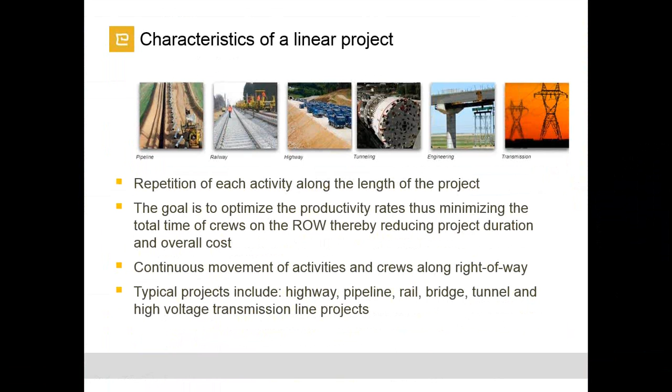And typically, linear project types can be, for example, road projects, bridge projects, transmission line projects, rail projects, metro projects, pipeline projects, and we also advise it for high-rise buildings of over 30 floors. We can also use TILOS there.

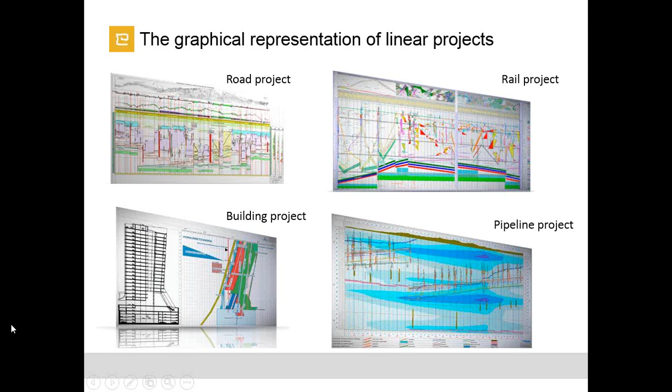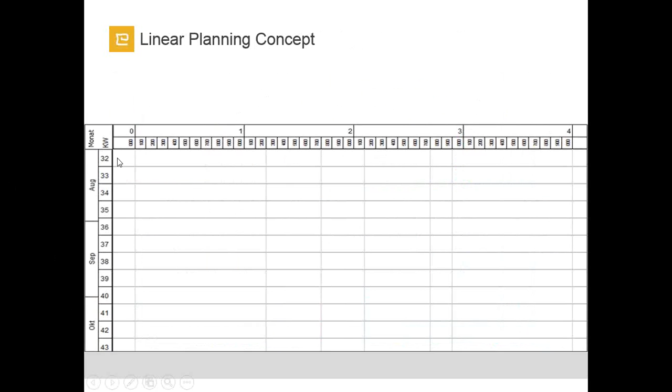And what is the concept of the linear planning method? Most of you probably know, but I would like to briefly explain it in case someone is new. So we have here our distance axis, which shows us our project is between 0 kilometers and 4 kilometers. And the project duration is more or less 3 months.

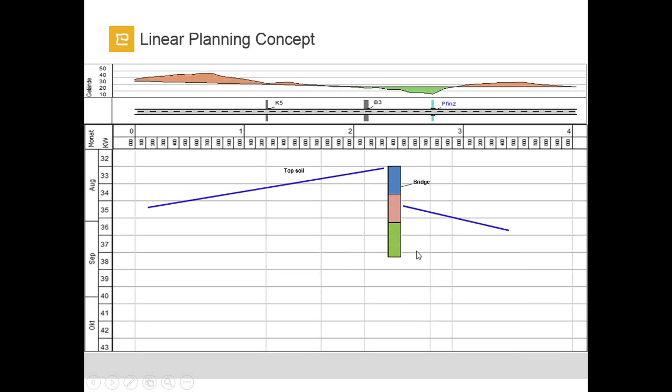Let's say that from the left side of the river, we found it more feasible, and we start our first activity, topsoil, from this chainage, moving to 0. Later on, we start from the other side of the river and move to the 4 kilometers. And it is also possible to plan non-linear activities such as bridges or culverts in our project in TILOS.

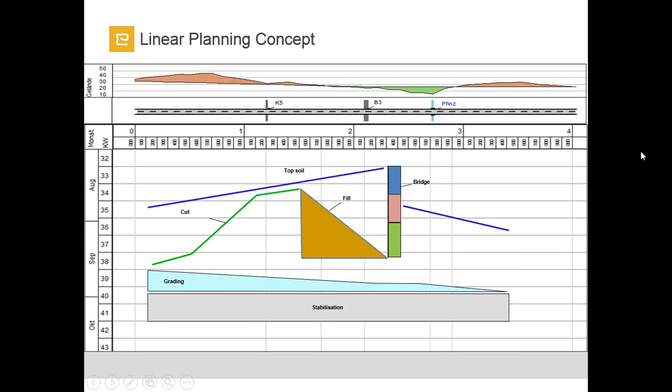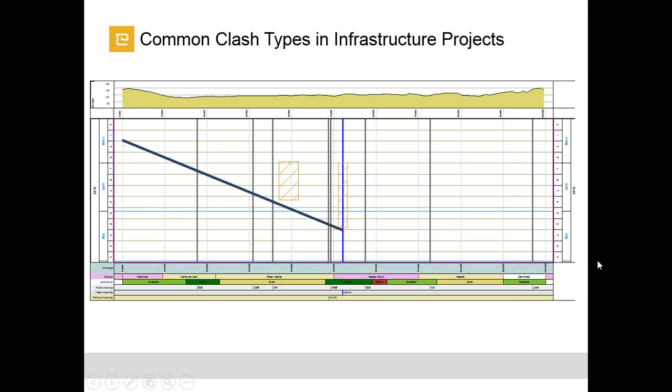So we can start again as we planned. We can come to this point, wait around 1 week, and again proceed with our work. Or we can again come from here and move the crew to the other side of the river. But in such projects, crew movements are quite expensive, so it's not a very preferable solution. And in this scenario, we moved the start day of the project around 1 week, and you see that we now have no conflict.

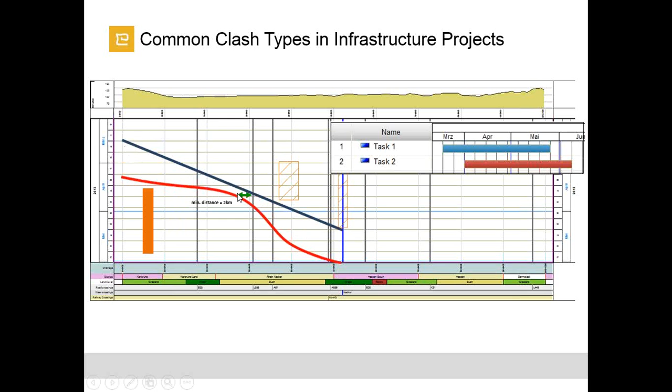We are telling the system these two activities cannot be closer than a minimum distance. Let's say that it is 2 kilometers in this example. So the system will not allow us to be closer than the minimum 2 kilometers to the first activity. Here, as you see, this distance is much wider. Also here, but it is taking the minimum distance. So in this way you can avoid the clashes in TILOS, and these crews do not come closer than 2 kilometers to each other.

So what we can say, comparing with the traditional methods with CPM or network diagrams, TILOS connects the geography and the constructability issues with a project. But CPM schedules or network diagrams fail to provide a visual connection between the project plan and the project itself.

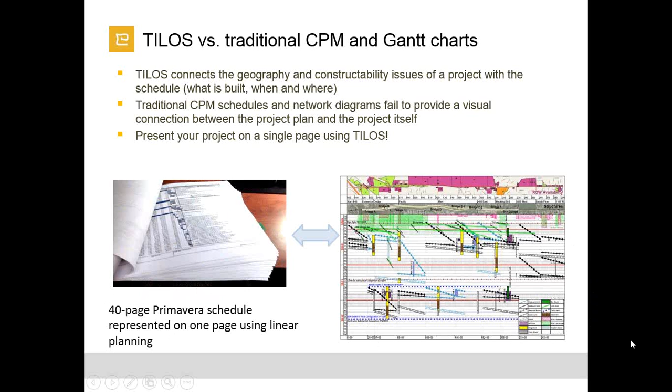And the second thing is, when we are producing a 40-page schedule, it is ambiguous and we cannot see clearly the interaction with the activities. But here, when we have all the activities integrated with geographical data and all the other information, we can clearly see if there are any clashes, what we should take into account in our planning starting from the early stage.

So we prepared here clash types. Of course, this list can go longer. Let's say crew clashes, for example, which we see mostly in our projects, and environmental protection clashes, traffic diversion clashes, utility diversion, multiple contractor clashes.

So this list can go really much longer, as nowadays our infrastructure projects are mega and really very complex, and they require control of the projects, and when we are especially working with multiple contractors, the communication problems are huge, and it is affecting our project on site. Even though we are working in the same company with different crews, it is challenging to have the best communication.

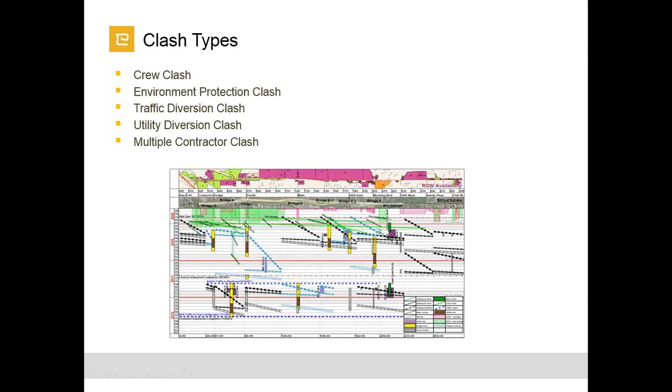So how is TILOS avoiding the clashes, eliminating the planning mistakes? As we said earlier, first of all, TILOS allows us integration of the data. We can import the graphics, we can synchronize them with our distance axis. We can add, for example, site data like elevations and the productivity profiles. And we can specify the distance between the crews to avoid clashes, and it is helping us to deal with the clashes.

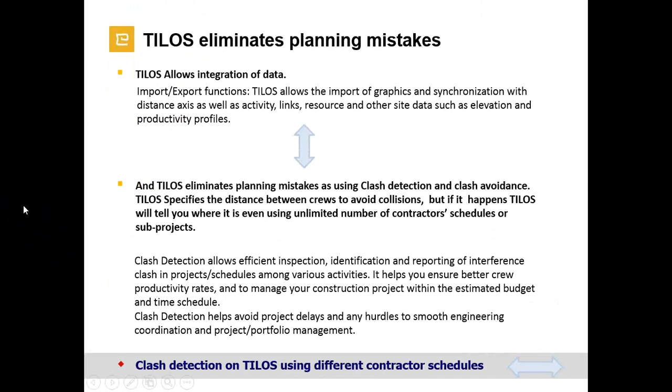Now I would like to show you a small demo project. I will also have a live presentation of it, but first of all I would like to move from the presentation. So the scenario is like this: let's say we are the main contractor and we have work to do, and we subcontracted part of our project to 3 different subcontractors. And the subcontractors prepared their own schedules, and as we are the main contractor, we would like to integrate all those activities as a whole project plan, and we will analyze if there are any clashes between them.

So let's say that this is our first contractor who is responsible for these activities, and he plans from which part he's going to start and how long this activity is going to take. And here you see that as a sub-project, we wrote this as Contractor 1. And now we have Contractor 2 also in the sub-project. You see here a different name as a sub-project. And let's say that these guys also have 2 activities. Their speed is the same, and they have a finish-to-start relation between the activities.

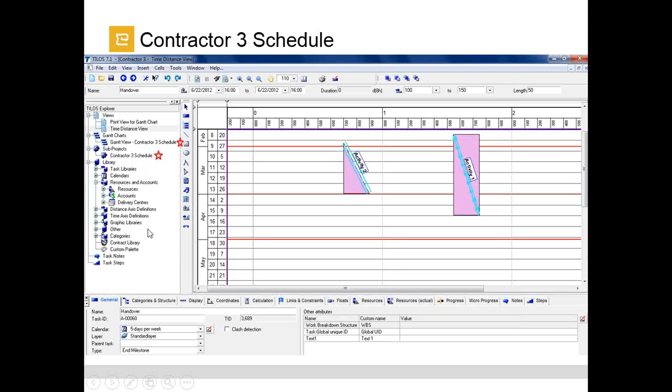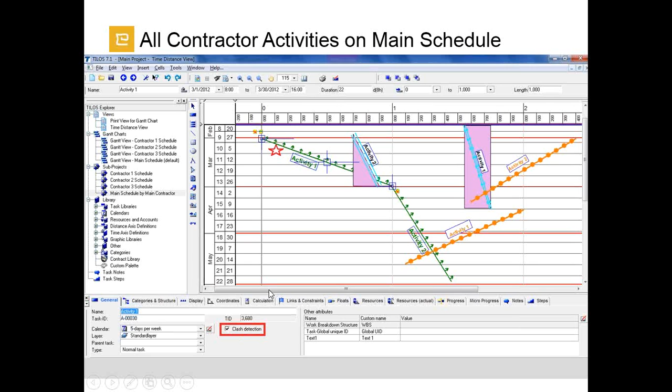And the third party is responsible for another 2 activities, most probably using two crews, and their projects are also written under the sub-project as Contractor 3. So we are now taking all those projects, Contractor 1, Contractor 2, and Contractor 3, and moving them into the main schedule. So we can now see all those programs in one layout. And here we can now run the clash detection. We can select that we will also use the clash detection.

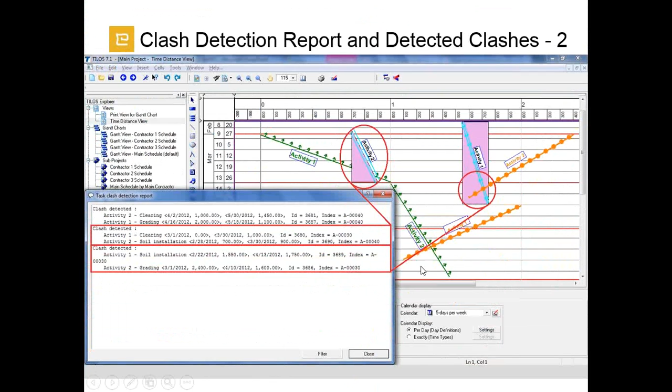Then we are running this, and the system is now producing a report saying that we have 3 clashes and also giving between which activities. So this is the clearing and grading, saying which distance and which time duration. So it is exactly showing me this intersection. The second clash is between the clearing and soil installation, and later on we have again the soil installation and the grading. So in total we have 3 clashes. So of course we need to find a solution for how we can solve these clashes. I will show this in the live presentation.

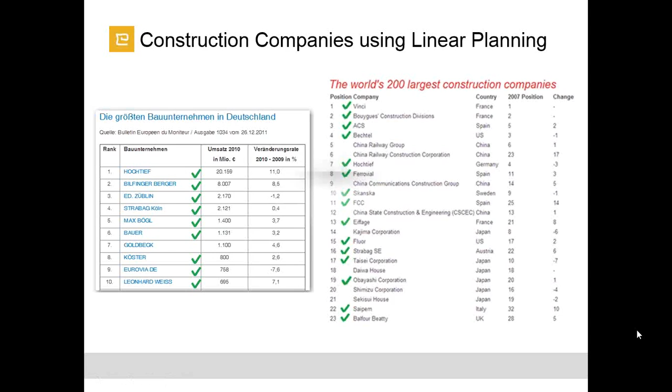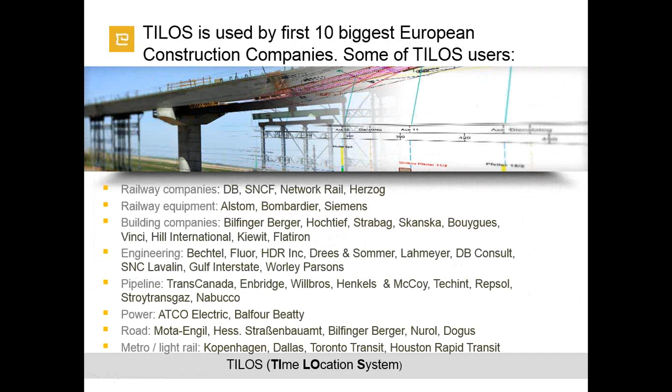Okay, this is the end of the presentation. Now I would like to open TILOS.

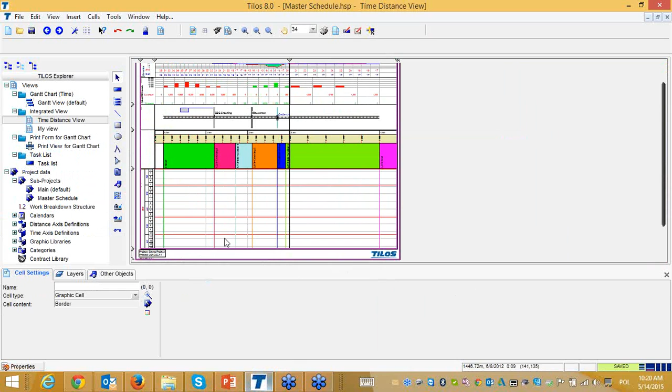So let's say that I am a main contractor, and I have prepared and integrated all the data that I know. I have here a pictorial view showing the intersections. I have here the elevation information. I have here the cut and fill amounts.

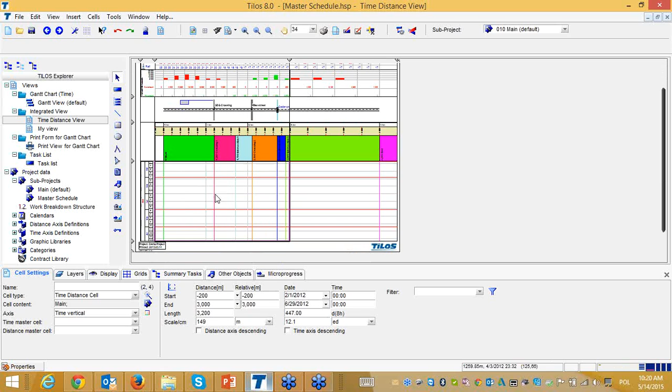And now, of course, I can have here activities. It is not a problem. But in this case, it is empty, but it is not a must. So my layout is waiting for integration of the other 3 parties. So here I come and open the first contractor.

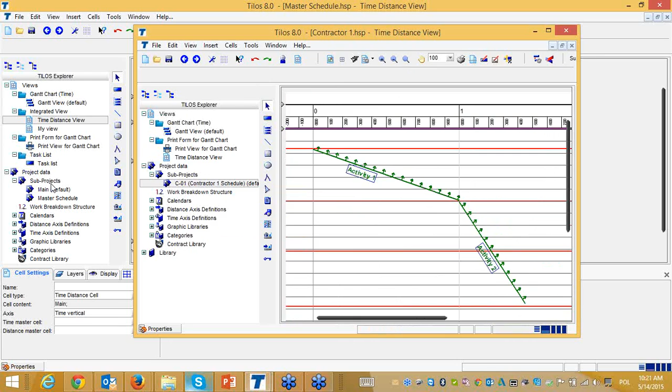And we said that this guy has 2 activities, is responsible for these activities. So he planned according to himself. And now what I need to do, I should take this sub-project. It's very simple. I just copy and I go here and paste. So the first contractor is pasted here.

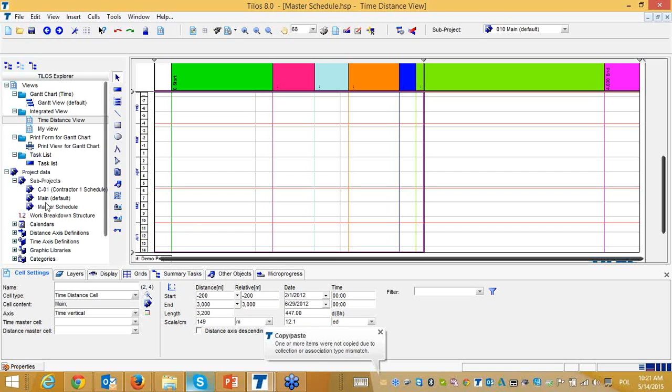When I go back to my time distance view, as you see here, I don't see any activities because it is about the cell content. I should click in the main cell. I should go to the cell settings, and here the cell content, as you see, is only main, which is showing only this part, which is empty now. So I select here my C01 contractor activities, and here now I can display those activities.

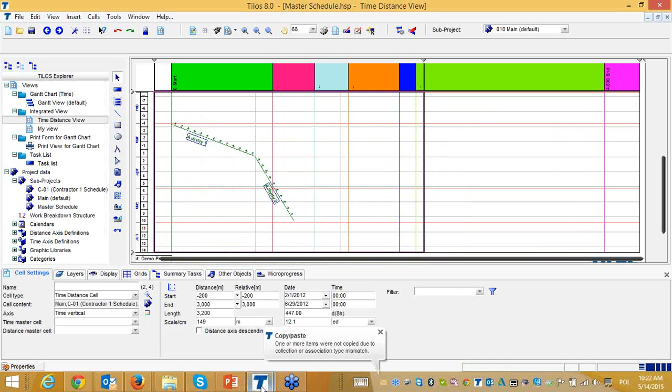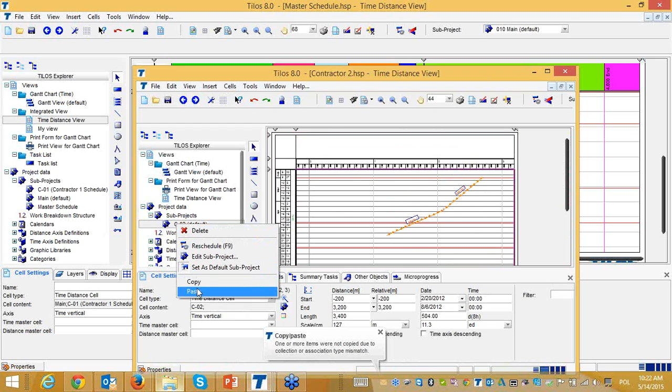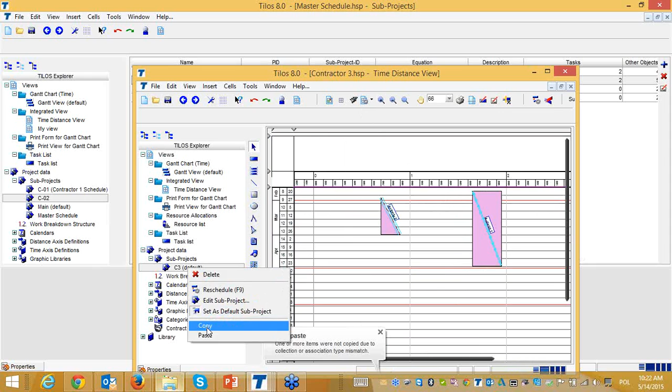So I go now here, my contractor 2, so here I again have only 2 activities. Of course, we made these demo projects very small, so as not to take your time. So I copy this one, I go here and paste. Now I select the contractor 3. So I have here those activities. So again I copy and paste

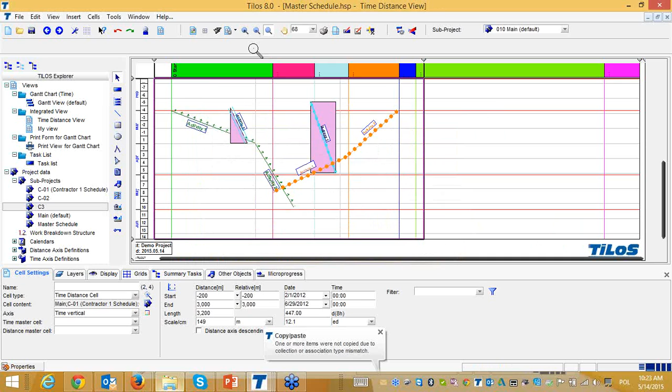into my master schedule. So as you see here, I have only contractor 1. So what I need to do, I should add as a cell content my contractor 2 and 3. So here I have now my whole schedule, let's say. The second thing I should check is this clash detection. So I should select the activities and I should say to run the clashes.

So here I have already selected. Of course it is a very simple project, so you can easily see the clashes yourself, but when we are speaking about thousands of activities, it will be not that easy. It will be really challenging to see the clashes. So here we have detect task clashes. I run this.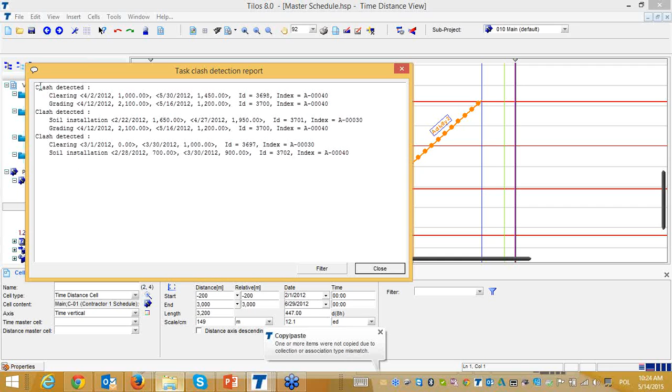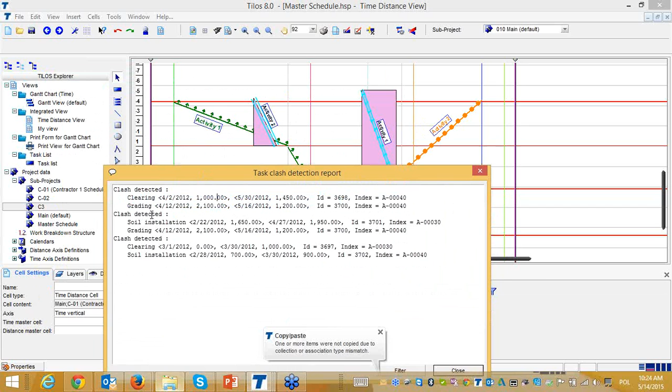And here the system now produces a report, a task clash detection report, which is telling me between which activities, in which time duration, and in which distance I have clashes. So I am looking at all those clashes. As you see, there are 3. And now we are thinking, what can we do? And we can avoid these clashes.

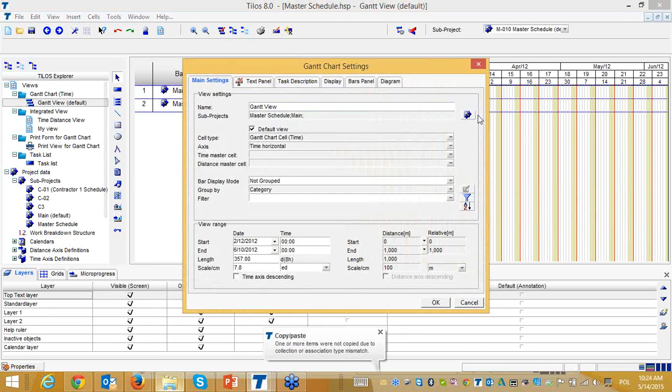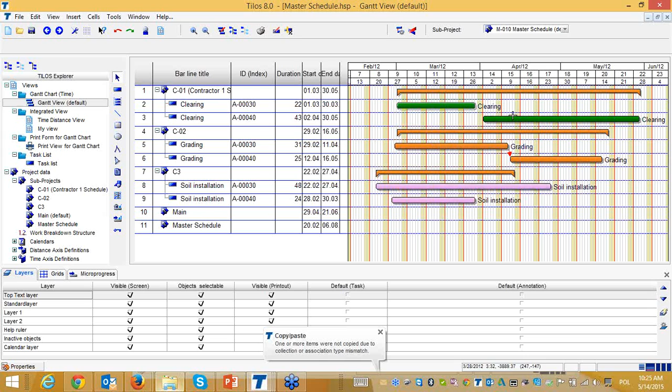I would like to open also this to show you also from the Gantt view. Here also what we need to do is we should add here the other sub-projects to display here all our activities. So we see here our contractor 1, 2, and 3. They are divided into 3 parts, and here I see the activities between them.

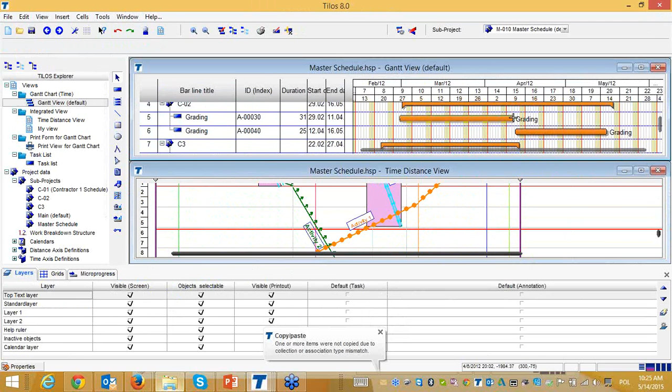So I want to open also my time distance view, and here as you see I have my contractor 2, and these are 2 grading activities. Yes, this is this and this is this. If I move them, you see that it is also moving in the Gantt. Yes. This is also a unique feature how we can solve quite easily in TILOS.

This activity actually is the most problematic because it is causing me two clashes, with the subcontractor 3 and with the subcontractor 1. So I should consider what I should do with this activity and solve this conflict. Of course, I can move this activity to another place and so on, but there is a much easier solution for this. Please also observe here in this Gantt and also the time distance,

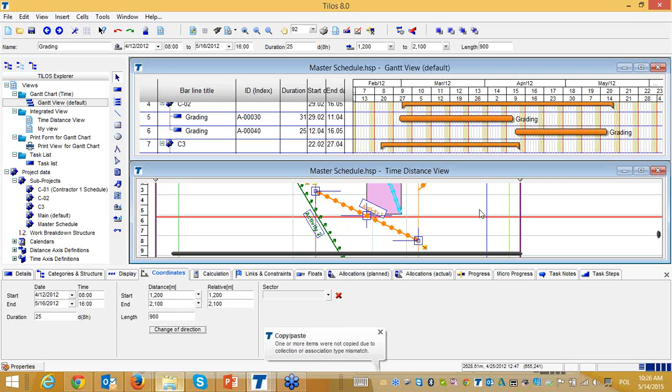I change the direction. So I have no conflicts. These two conflicts are solved together. And here, as you see, there is no change actually in my Gantt chart, because I don't change the duration or the length of the activity, but I only change the crew movements, the direction of the crew, which is helping me to solve both conflicts. If I run this detect clashes now, as you see, before I had 3, and now I have only 1 clash.

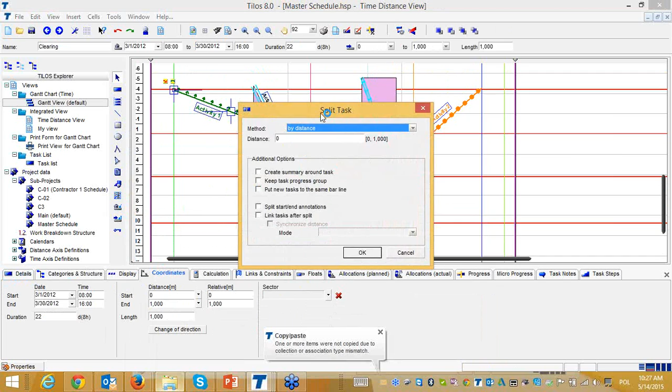And I'm here also looking at what I can do. In this case, changing direction is not helping, so I should maybe do a different thing. For example, I can split the task, because until here I have no conflict; the conflict is only in the second part. So maybe I can try, as a solution, to split my activity. As you see now, this is like 2 activities, yes. And I can move only the second part. It was somewhere here. So I don't change the first part.

As I planned, I can move with this activity, but here I can say I will wait for this subcontractor, and then I will move after activity 2. It can be a solution. Of course, this should be done by site managers or the project managers or the planners. So when I save this, what else can I do?

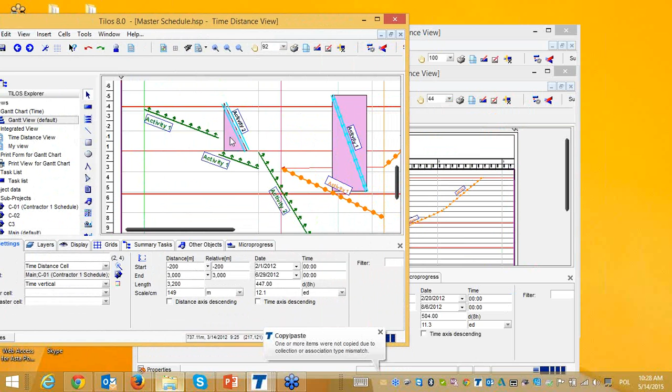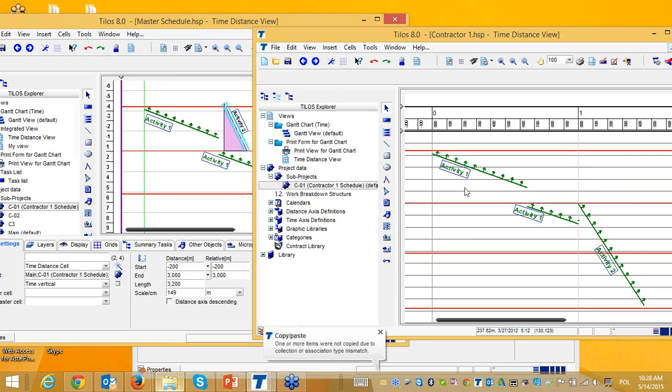For example, as a main contractor, I took all those company planners, I spoke with them, and we found the solutions, and now they want to proceed with their project. It is very easy, because they don't need to do all those changes one more time. I can simply take this and drag and drop here, and as you see, what we have decided all together, we planned. Now they can copy this back to their own TILOS file. They will have all the changes at once. So it is also saving time and makes the work easier.

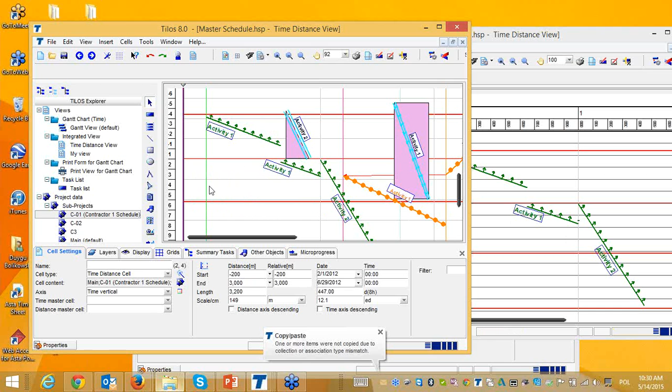With the clash detection, it shows the task and date-time clashes. Are you able to display the contractor that is causing this? I mean, this is what we do. I don't understand your question. Maybe explain this question better. But here, actually, this is symbolizing the subcontractors, yes? So here we actually see the contractors. We have 3 subcontractors, and we are like a main contractor. And now we integrated all of them, and we saw the clashes, but we cannot say the name of who is responsible for the clashes. If this is your question, we cannot. We just see the activities.

One second. Jonathan, you can do this only if you know which contractor is causing this, but it will not give it to you as a report.

Okay, my name is Duygu Bolikowski. It was the easiest question. Thank you, Enes.